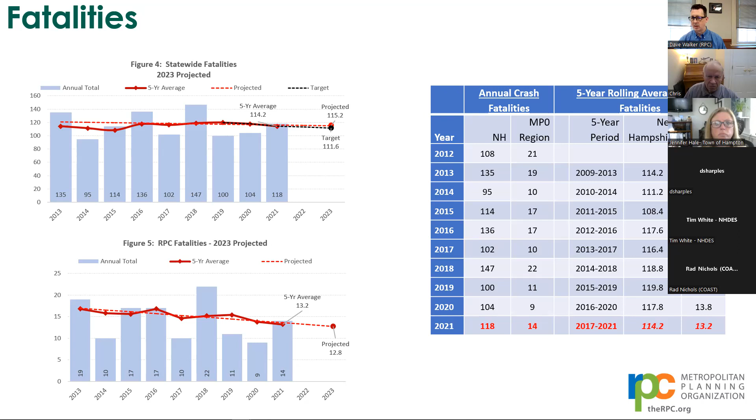And the fatality rate, which a lot of times mirrors the fatalities themselves, at the state level, we're seeing again a fairly flat line in terms of how things are projected to occur. The rate moves up and down slightly every year. We saw an increase in the rate to some degree during COVID, where the VMTs went down, but the number of fatalities didn't decline as much. And we're seeing some of the results of that now showing up in the 5-year trend averages. So again, this one is set up with state numbers on the top and regional numbers at the bottom.

And again, the regional, we're seeing more of a slope curve there with a downward trend projecting outward. In this case, at the state level, the projected versus the target are very close. The projected statewide fatality rate for 2023 is 0.861. The state has set a target of just slightly less than that at 0.857. At the regional level, our projected target would be 0.564 if we did our own.

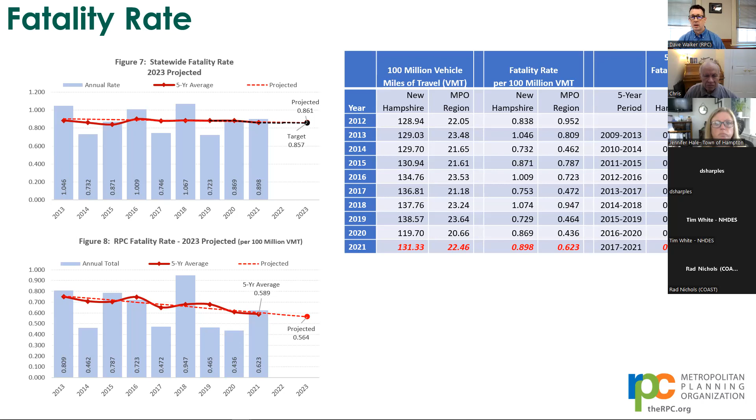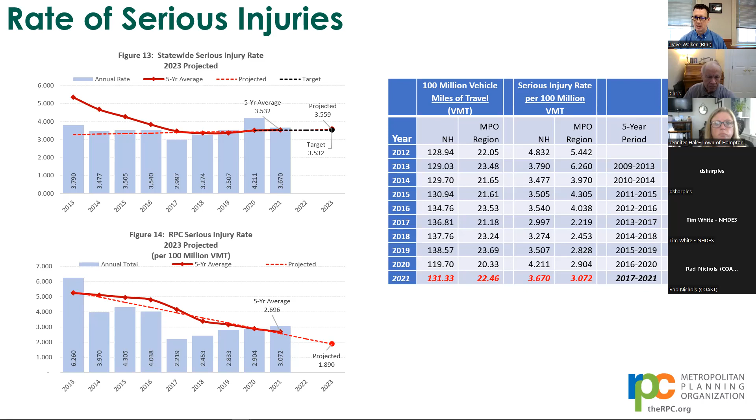Looking at the regional numbers, again, our slope on our trend line is much steeper and has been a little more consistent in that regard. Although we've seen a consistent decrease in the 5-year average rate over the last 5 or 6 years. So things are starting to level out, it seems like, in the region, although the trend line is still projecting downward. Again, similar to the fatality rate, it would have to be a serious drop off in the number of serious injuries in the region in order to reach this projected 2023 rate of 1.890 serious injuries per 100 million vehicle miles of travel. So I would expect, in actuality, that will kind of level off a bit more, consistent with the last couple of years.

On non-motorized fatalities and serious injuries, these numbers are a lot lower than overall motor vehicle fatalities and serious injuries. So there's a lot more movement in the chart because it doesn't take a lot to have a large increase. And at the state level, you can see that it's a fairly steady decline over time. There was a bump in 2021 with a slightly higher number of bike and pedestrian fatalities and serious injuries, but overall the trend has been declining for the last 6 or 8 years.

In this case, the projected value was 33.2 non-motorized fatalities and serious injuries in the state for 2023. The state did not feel like that was a realistic number that was achievable. And so they set the target at 37, which is still lower than the current number, but probably a more reasonable short-term target.

At the regional level, we have the same sort of steep decline over time that we've had in many of the other areas. But our numbers year to year have been fairly consistent. We've had 6 bike and pedestrian serious injuries and fatalities over the last 3 years. So I would expect, looking at just the last several years, our 5-year averages are going to start to level off a bit, and that trend line will start to level off. Using the current linear trend, however, it projected that we would have 4.6 bike and pedestrian serious injuries and fatalities for 2023.

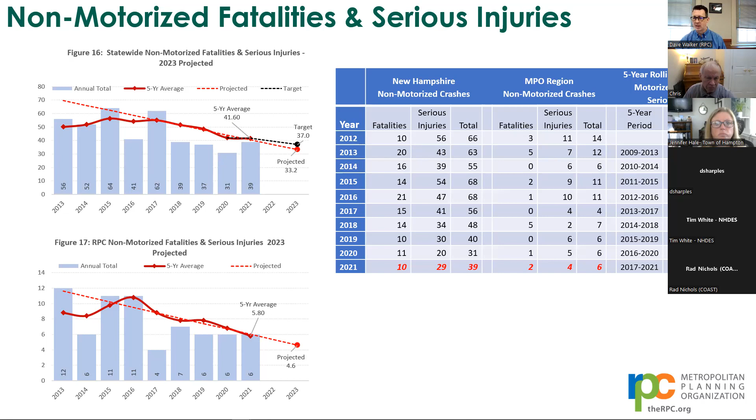So the final one that I want to talk about is motorcycle fatalities. This is an MPO only measure. The state does not track this measure. So we set this one independently from the state, and each of the MPOs around the state has taken on this additional target. But we still are including the state data and the regional data in here for consistency purposes.

And so if you take the state information and run that out, they are projecting 23.2 motorcycle fatalities for 2023. That trend line at the state level has been slightly rising a little bit, I would say. The 5-year averages have stayed pretty steady over time, but we've had some spikes in there that are pushing those numbers up a little bit.

At the regional level, we pretty much go between 1 and 4 motorcycle fatalities each year, and that's stayed fairly consistent at that level. Last year in 2021, we had 2 motorcycle fatalities. And so this has created sort of a flat 5-year trend over the last several years that I would see continuing. And then through that projection, we see for 2023 that it's expected to be 2.9 fatalities for the 2023 year. And again, that's a 5-year average. That's why we're getting the 2.9 as opposed to 3 or 2 or something like that.

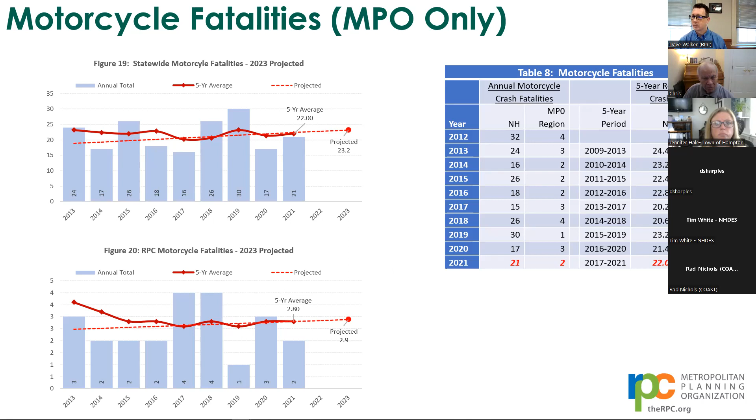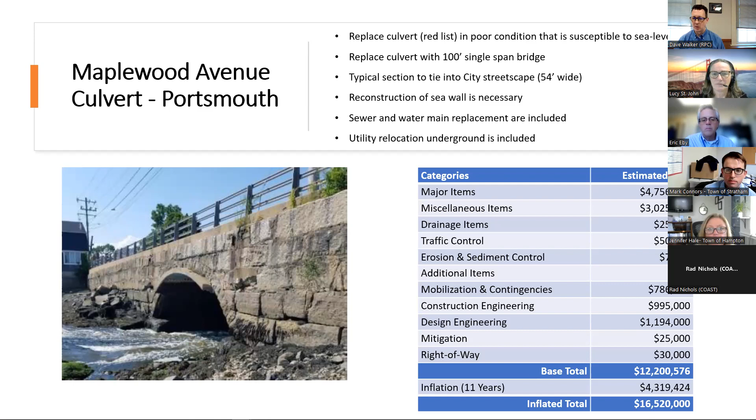And inflation also is added into this. So there's another $4 million in inflation by inflating this out to 2033, I think is where we started with. So total cost on this project is estimated to be $16.5 million. This does include some utility work, of which, that's a question that I would have for DOT as part of their review as to what pieces that might be eligible to be using transportation dollars to pay for. So that's a question we'll put forward to DOT at that point.

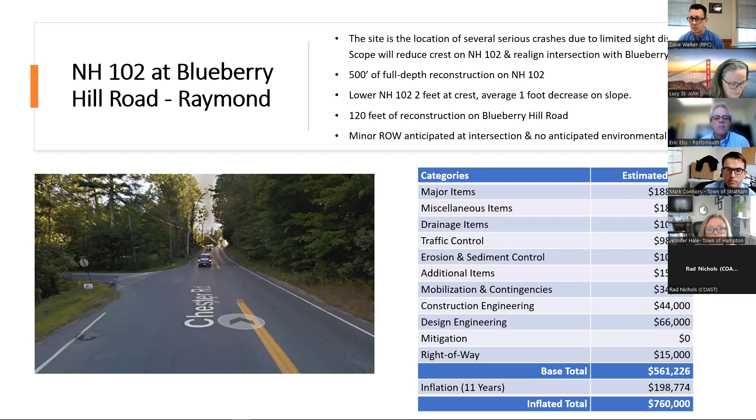High Street in Hampton. This is a project that will look at raising the profile of High Street near the intersection with 1A, raise that by about 3 feet across a 1,200-foot stretch that runs along the edge of the marsh. And is impacted by flooding issues now, and is anticipated to be impacted by more flooding issues under higher sea level rise conditions. So this is one of those, this one and the US 1 project in Hampton Falls.

At this point, these are just data points. We're not sure that this is really the best approach for this location or not, as it creates a mismatch between the height of the road and the height of the housing that's on the north side of the road.

And so that could create some additional problems. There are also expected to be some wetland impacts on the eastbound shoulder as this project is done, because if we have to raise the road, those shoulders will extend a little further into the marsh. Overall, though, this is not, based on this estimate, a super costly project.

Its base cost was just under $2.5 million. And when we inflated that out, it adds another almost $900,000. So 3.3 million is our estimated cost on that at this point.

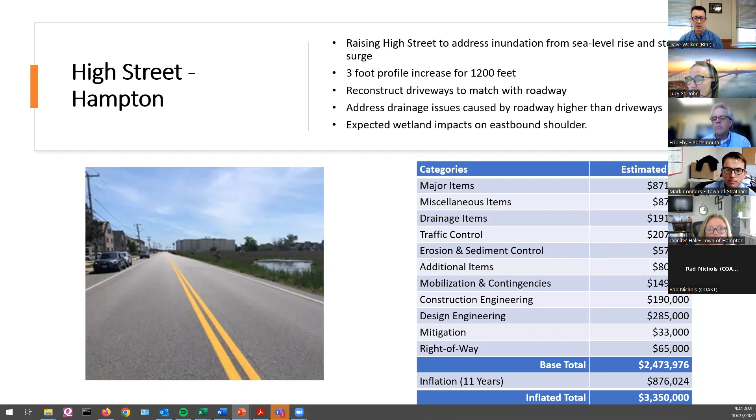Portsmouth Traffic Circle. This is a project that's been floating around in our long range plan for probably longer than I've been here, so 25 years or so. This would replace the existing traffic circle with a 2-lane modern roundabout with slip lanes for right turns. This is based on a design from a feasibility study done in the year 2000 and analysis done for the bypass at around that time.

An advantage of this project is that it's an already disturbed area and there's no expected environmental impacts. And given the size of the existing circle, a big chunk of the work can occur within the existing circle, so you don't have to disrupt traffic quite so much. This is a relatively expensive project, and our base cost is estimated to be about $6.2 million with an inflated cost of $8.4 million roughly.

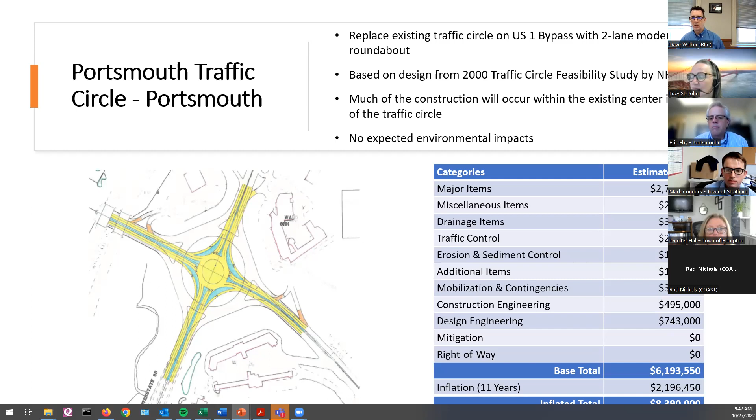This project is interesting. This is on US 1 through the Hampton Seabrook Estuary and Hampton Falls. I think I scoped quite possibly the most expensive project possible for this. I'd like to think maybe it's the most expensive. I can't imagine something more expensive. Maybe if you made a much longer bridge, maybe that would be more expensive.

Basically what this would do would be raise the profile by 4 feet along about 840 feet of roadway, and then basically exchange 1,200 feet of roadway for a bridge down the other end, which would eliminate the sea level rise impacts on that section of road. But it's a very expensive proposition to do all that. Either way, there are expected to be some environmental impacts in the adjacent estuary.

But there may be some benefits to bridging it in that you get better water flow through the estuary. You don't have this barrier to water movement that Route 1 is now, but there's a lot of analysis that probably needs to occur before anything is done at this location. And especially given that the cost is orders of magnitude greater than our regional target, this is not one that is likely to get funded in the near term, but I feel like this is a good data point for us and a good starting point to talk about the needs at this location.

Base cost, $65 million. Most of that is in the additional items, which is essentially bridging. So that's a very expensive proposition. When we inflate it out another 10 years, that adds another large chunk of money. So it adds another $23 million. So our total estimated inflated cost is just over $89 million.

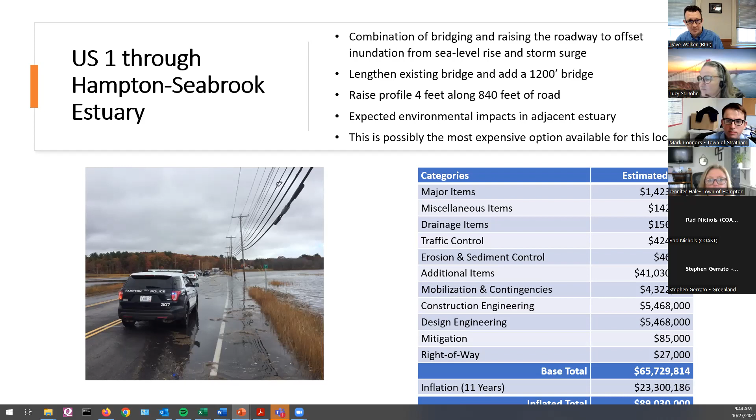All right, back over to Stratham, New Hampshire 108 bike ped improvements. This is making improvements to sidewalk facilities and shoulders on 108, which is a high volume, very wide and high speed roadway through this section. This will add sidewalks, side path, and some improved crossings and connections. So we're looking at adding just over 3,000 feet of sidewalk along 108 southbound and 5,600 feet of side path along 108 northbound, and adding mid-block crossings at 3 locations there.

So I forgot to change the picture out, so we're still looking at a picture of the Route 1 in Hampton flooding. So that is not what 108 looks like through there. So this project is a lot less expensive than the Route 1 project, and it comes in as a base cost of just under $2 million, so $1.8 million. Inflated out 10 or 11 years, this comes up to just under $2.5 million.

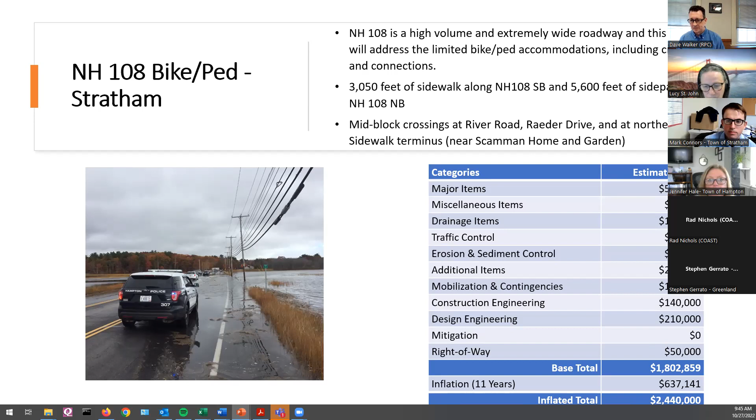All right, so back over to Hampton, Route 1A, Ashworth Avenue complete streets. This would basically improve bicycle and pedestrian accommodations between Nudd Ave and Dustin Ave in Hampton Beach. This would put 8 foot sidewalks on both sides of the road and include a 5 to 6 foot bike lane. That design is based on the Hampton Beach Transportation Master Plan that was completed in the 2018 timeframe, and so this estimate is based on that information. It would also include 2 11-foot travel lanes and 20 mid-block crossings with curb bump outs.

This does not deal with any of the sea level rise or flooding issues along the road, although it would improve drainage as part of it. The reason that this is included is this is the one section of 1A that isn't included in Hampton 40797, which is the Ocean Boulevard reconstruction project. So we sort of wanted to complete the circuit on that and get at least a cost on what it might take to deal with this section of the road.

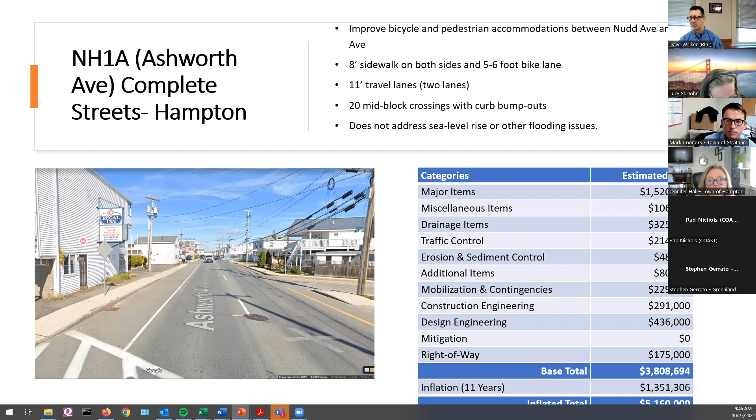So overall, this is a little bit of an expensive project, not terrible, but a little higher than some of the others that we've seen. A base cost of $3.8 million. There's a lot of work that would need to occur on the road to deal with that and make those improvements. And then with inflation, we're adding another almost $1.4 million to that for a total cost of $5.16 million.

Okay, and last but not least, the last project that made it to our short list was the Stratham Circle redesign, where 108 and Route 33 come together. This would reconfigure the traffic circle into a single modern roundabout intersection. This design is based on the 2010 Stratham Town Center District Study, and basically it would put that circle in what is sort of the northwest quadrant of the current circle.

So it does require some culvert and dam replacements, as there's a pond in the center, and the drainage runs right underneath where that roundabout would be proposed, so it would need to be addressed. It would also dead end what is now the current northbound segment of that circle.

So this is a relatively expensive project, I think, given the scale of changes that are occurring, estimated at just under $8.9 million base cost. And then when we inflate it out 11 years, it adds another $3.1 million. So it gives us about a $12 million project right there.

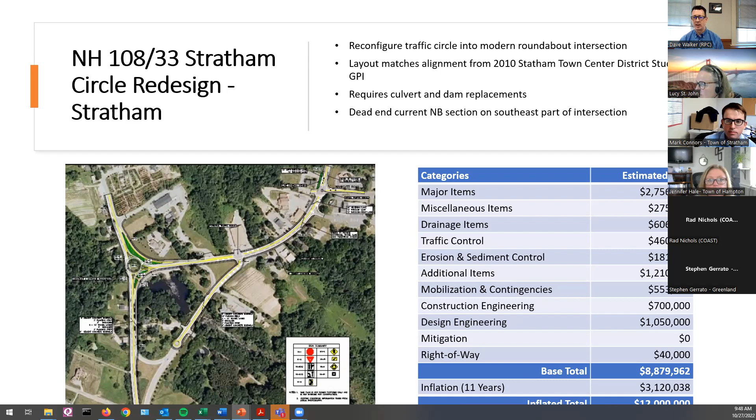So what we need to do today is make recommendations to prioritize and fiscally constrain our list to send to NHDOT for review. Typically, this would mean constraining it to $8.055 million, and then adding 2 projects to that to give us some options. In this case, pretty much no matter how we cut it, that gets us to the 5 projects that are pretty close to being within the budget.

And so after talking with William Rose, he indicated that us submitting 5 projects would be okay. So that makes it a little bit easier for us in that we don't have to make a decision at this point about dropping projects. Well, I guess we still do, but I think it'll be the fairly obvious projects. And we do need to send a prioritized list to DOT, so we do need to prioritize them.

In that regard, I have put together a proposal as a starting point for the TAC to work from. This proposal is that the 3 projects that are by themselves, from an uninflated perspective, greater than our regional budget target, we'll submit to DOT for information only, just to make sure that they have those estimates. But we won't be looking for them to review them or provide comments back on those. It's just really for their information.

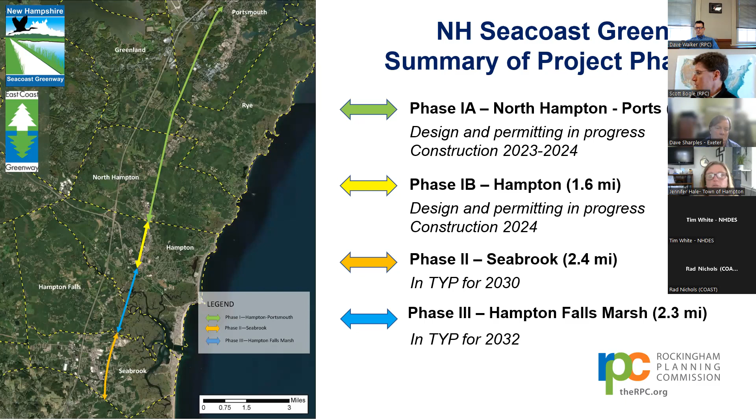So we've talked a bit in the past about our technical assistance grant that we currently have with the National Park Service Rivers, Trails and Conservation Assistance Program. There are really three projects we have that group working on. The first of those is this community connections and trail access points element. They're also working on a signage plan for the corridor.

One of the stipulations of the trail management agreement that each town signed with the Department of Transportation is that before signs can be installed, we need to produce a signage plan and get DOT's okay on the signage types and locations.

And then we're also getting some assistance from the Park Service in standing up a new nonprofit trail organization that will have a role in trail promotion, in fund development, and in volunteer recruitment and management for doing routine trail maintenance in each of the communities.

So as part of that first element, Julie Isbill, who's the leader of the Park Service team, connected us with Bob White, who works for GPI. And he had worked with Julie on prior projects in Maine, organizing Maine's chapter of the American Society of Landscape Architects to recruit essentially a team of landscape architects and other designers for charrette projects on trails.

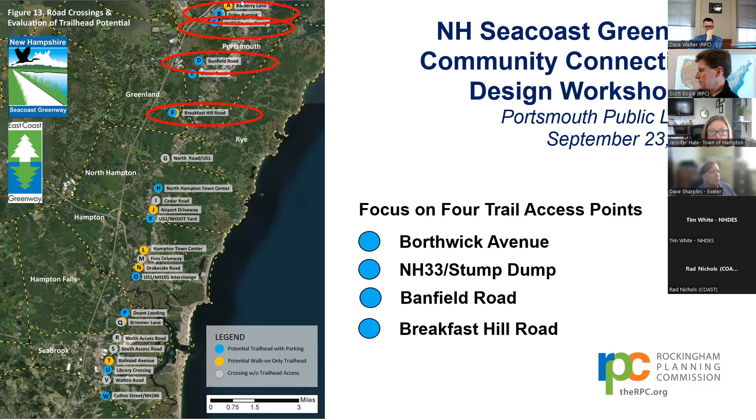Okay, so just running down the corridor, the first of the sites we looked at was Borthwick Avenue. There's actually a relatively new road off of Borthwick Avenue, Eileen Dondero Foley Drive, and a trail connector off of that connects to the rail trail. On that road, there's a new parking lot, a new medical building, which is sort of serving as an ad hoc trailhead currently. But that's a private building, private land.

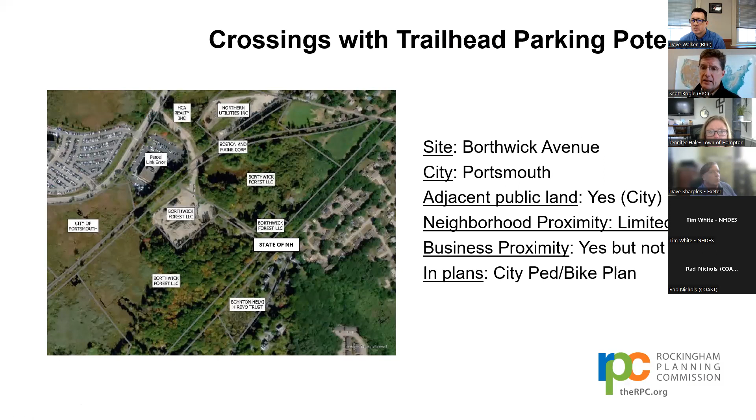And the assumption is that once that building is fully occupied, it's really not going to be practical as a trailhead. However, just across Borthwick Avenue, the city owns land here. So here's Borthwick. Here's Eileen Dondero Foley Ave. There's a side path on Foley Ave that leads down to the rail corridor.

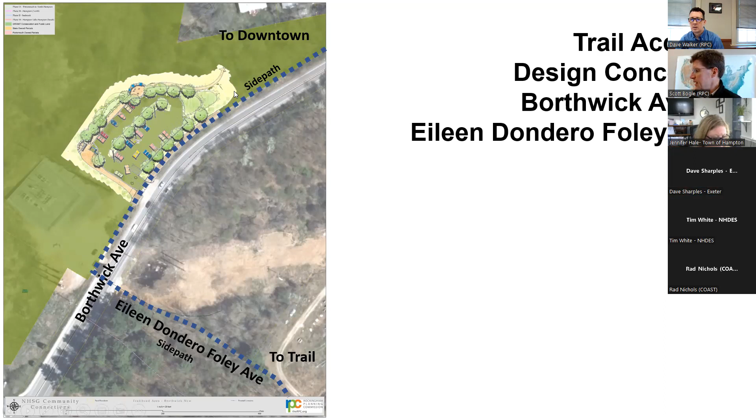The city has in the planning a side path that will run along Borthwick, cross over the bypass, carry on through the new West End Yards development, cross over Bartlett, and then along the North Mill Pond and meet up with Maplewood Ave. But so the first of the design concepts was for this lot on city-owned land here. So this holds about 40 parking spaces.

The charge for the design teams was for each of the corridor communities setting a goal of trying to come up with at least one site that could support parking and a range of amenities, including a kiosk, potentially a shelter, ideally an enclosure for porta potties, as well as water, potentially a bike maintenance station.

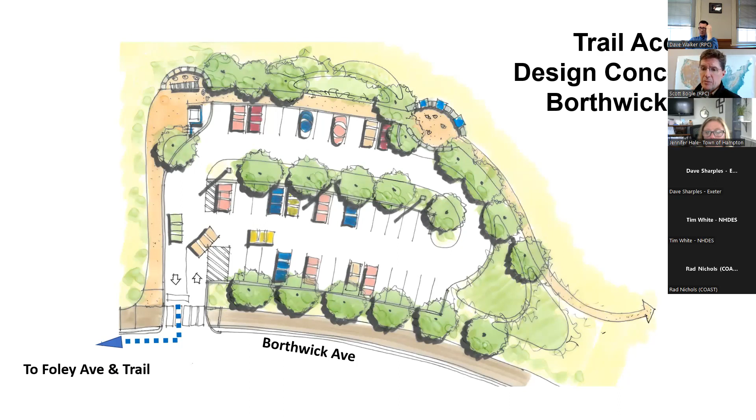So the next of the sites that the team looked at was what's known as the stump dump. Here's the rail corridor. Here's Route 33. Greenland is this way. Then Islington Street heads off here. This parcel here is currently being used as a layup area by Severino Construction, but the city has planned to put a skate park here as well as a trailhead site.

Portsmouth actually has in their CIP funding for developing trailheads at the stump dump site as well as at Banfield Road. So there is adjacent public land here, not much in the way of business proximity. There is adjacent neighborhood over here, as well as park facilities.

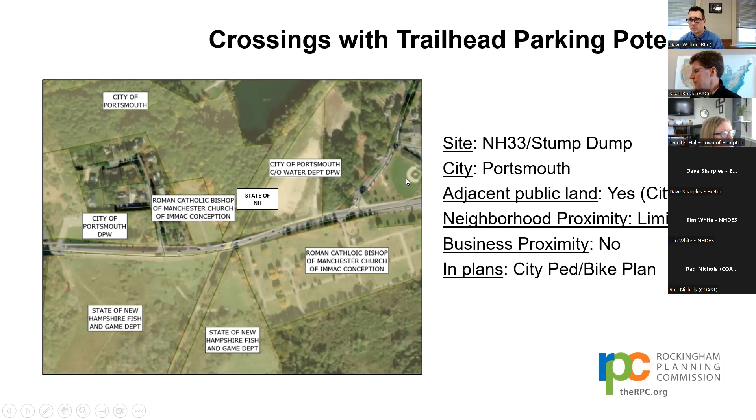So here's the concept of this. Essentially, during the day, we had the design team doing drawings. We were able to scan those on the fly, put them onto base maps that our GIS folks had prepared. For this site, we also had the 30% design documents from Weston & Sampson for the skate park itself, and so how this all fits together on this site.

So there's already planned parking for the skate park. The design concept was to extend that further to the north, a little bit along the same property, fitting in an additional 30 or so spaces, and then joining up to the trail up here.

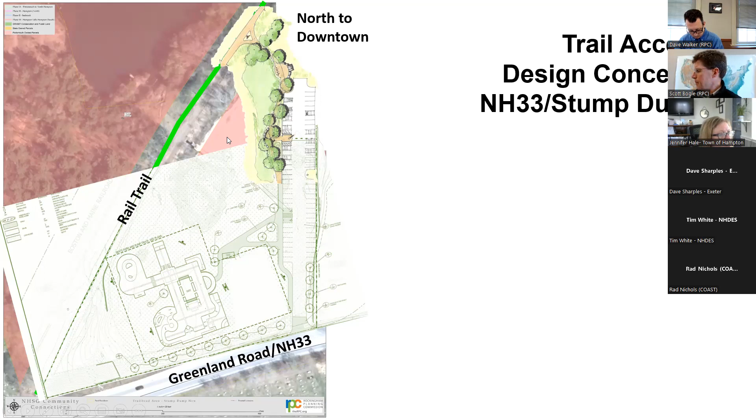While the bulk of the corridor is going to be a stone dust surface, Portsmouth has a plan to pave the corridor from Route 33 north into town to facilitate access for kids coming in with skateboards and just for maintenance reasons, that being what's anticipated to be a heavier trafficked area. And then you see a close up here.

Banfield Road, here's the rail corridor coming down from the north, owned by the state. Here's Banfield Road. You have an acute angle intersection. The actual crossing here, I think, will be straightened out for safety. As part of DOT's design for the corridor, they are planning comprehensive safety treatments at each of the grade crossings, including rectangular rapid flashing beacons.

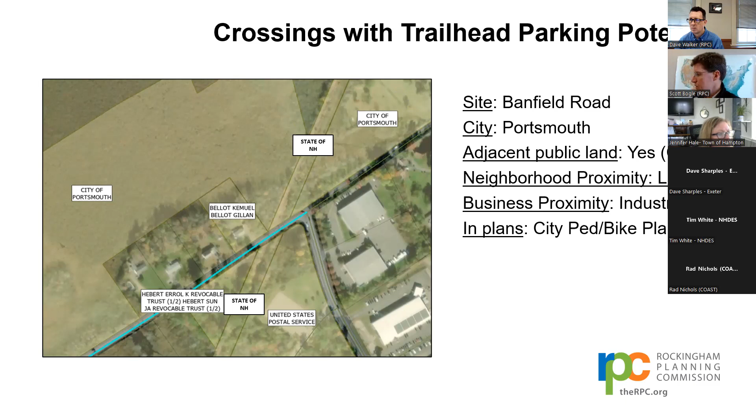But for this site, the concept the city has in mind is not to have trailhead right here at the intersection, but rather farther up here. This parcel is also known as the TP property that some of you may remember reading about in the news years ago when the city acquired it. Part of the reason that it's not practical to build trailhead right at the tip of that parcel is that section of the lot is wet, designated as wetland. So this design looked to get up outside of the wetland buffer area.

This is the site where we believe there's potential to put an equestrian facility as well. This has about 35 parking spaces worked in, a shelter concept here. There's some beautiful trees on the property. The expectation is to look to save those. There's also city water and sewer here, so there's potential for water service as well as sewer.

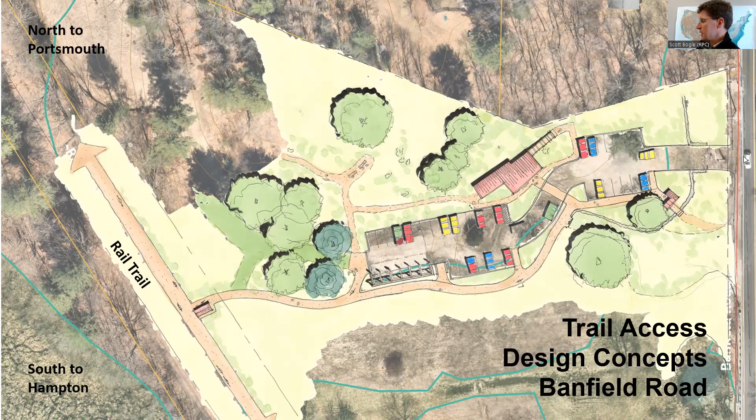The design team came up with concepts for shelters for a couple of the sites, mainly this one, and there will be a shelter at the stump dump site. And then you'll see one further south at a site at the North Hampton town line.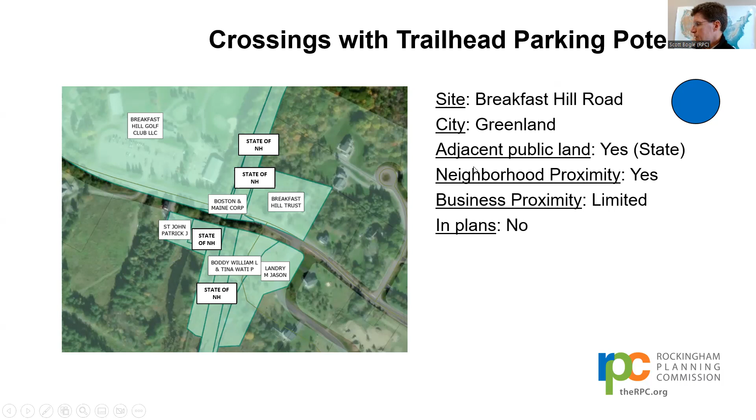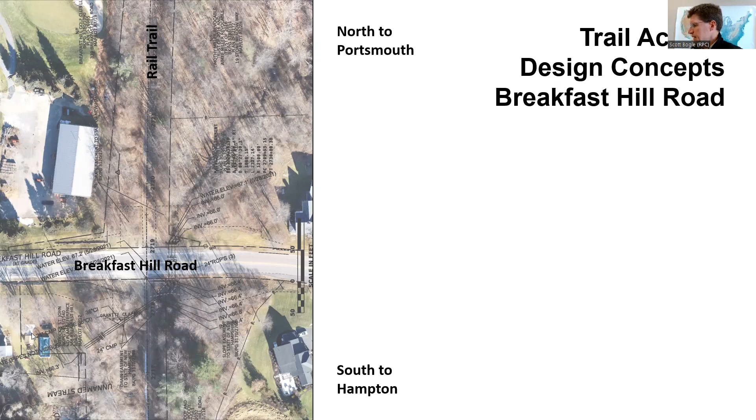In terms of residential development, there are several big neighborhoods, several big subdivisions about half a mile to the west. And there is a plan that's expected to come forward, I think, in both Greenland and Rye for a substantial new subdivision up here on the northeast quadrant. The corridor here gets unusually wide through most of its length. It's about 66 feet wide, I believe. It gets a bit wider here at the road intersection. And then you can see this parcel here. You can see some encroachment in here from the neighbor. There's a shed and an above ground pool that is in that space.

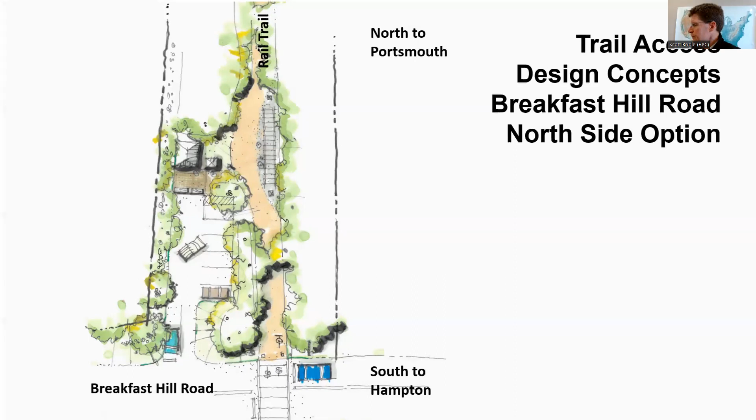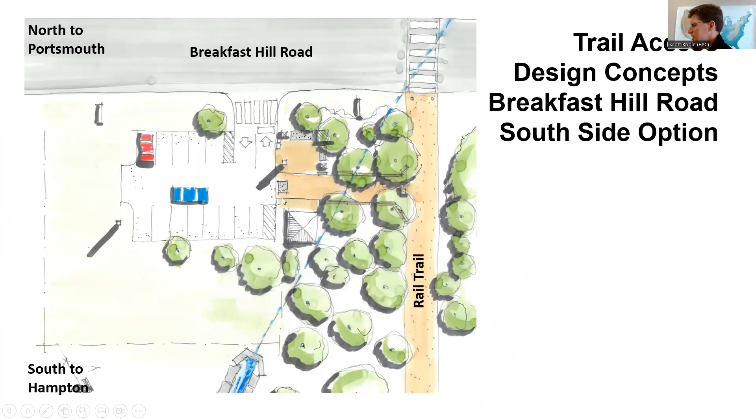The design team came up with a couple of concepts that, with that additional width on the north side of Breakfast Hill Road, you could fit in, say, half a dozen parking spaces with a small shelter. Concept here, keeping in a section of railroad ties and rail. It would actually mean bringing in new rail because the rail has been removed at this point. But having something that is a reminder of the railroad usage of the corridor historically. And then a layout for that parcel on the south side of the road, where there's potential to fit in. This shows about 13 spaces. So that was the work of the first of the design workshops.

The second one we just held last Friday at North Hampton Town Hall. And we looked at 5 additional sites here, right in the town center where the corridor crosses under Route 111, the L.L. Bean Plaza on Route 1, where the trail passes under Route 1 at the North Hampton town line, looking in Hampton Town Center, and then down at the Route 101 interchange.

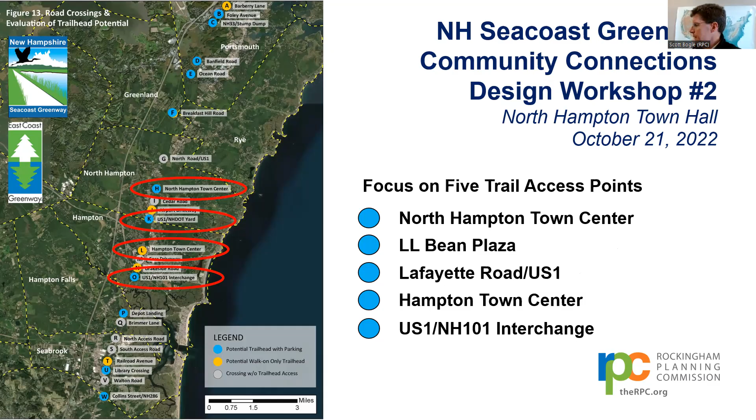We had some overlap in our design team for this workshop. Bob White from GPI and Ken Frere from Placework. We also had some great additions. Terrence Parker, who's a Portsmouth-based landscape architect and had been involved with the Eastern Trail project in Southern Maine. Colleen Wolf from DR Horn, Jeff Brubaker, who's now the Eliot town planner, but had worked as a bike ped planner with Toole Design Group prior to that. Tony Ciolfi with TEC Engineers in Hampton, and then our team from National Park Service, which included actually 2 landscape architects and a graphic designer.

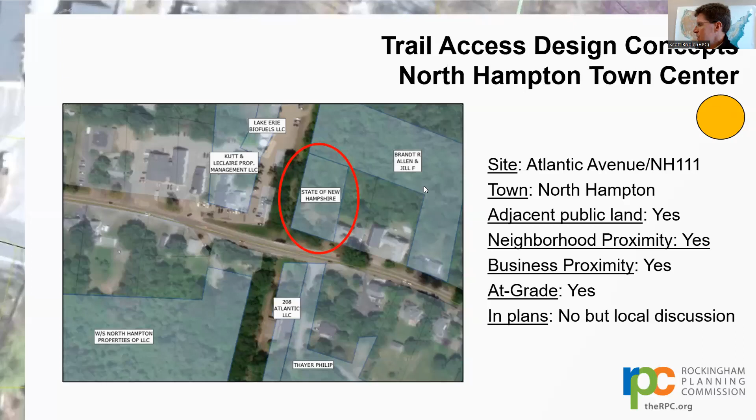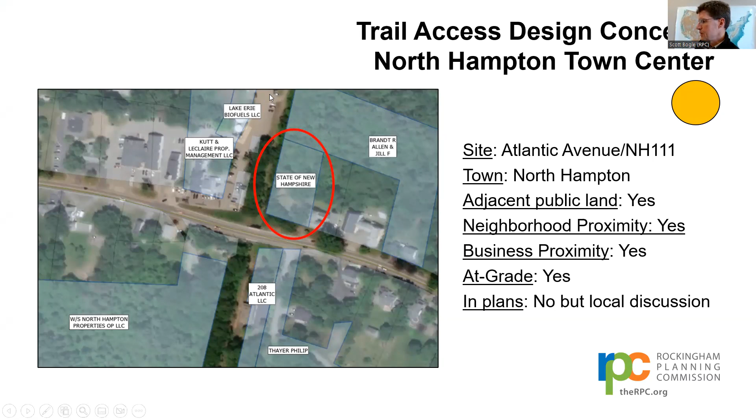The town is, let me go back up, in conversation. In this map, this shows as being part of the rail right-of-way, and that's actually outdated data. Currently, that is privately owned next to the rail corridor, but there's a space up at the top of that parcel where the town's been talking with the landowner, and the landowner may be amenable to having a small trailhead of 10 to 12 parking spaces, so there would be some parking access here. So here is the concept that the team came up with for North Hampton Town Center. The town's been in discussion with the L.L. Bean Plaza. This also has a Marshall's and a Home Depot on it.

Along Route 1 that some of you may be familiar with. The owner of the plaza as a whole actually owns other big box and retail plazas of this sort in Massachusetts, one of which at least has an L.L. Bean, and at another one of their locations, the plaza owner and L.L. Bean had cooperated with the local trail organization to establish a trailhead, set aside some parking spaces as part of

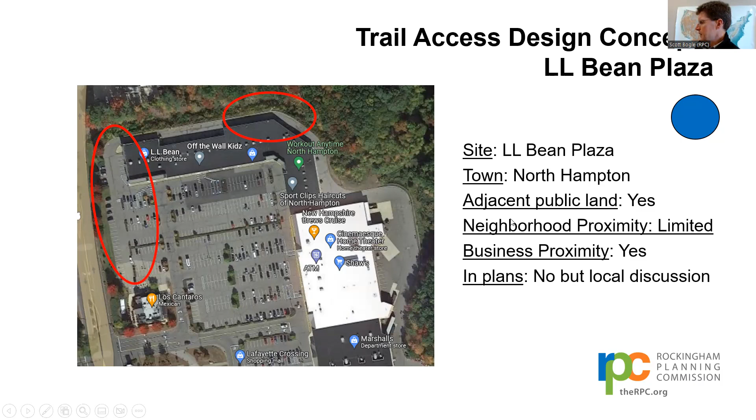the shopping center lot. And so the concept here, currently there's a goat path that heads out from the northern part of the parking lot towards the trail. And at this point, the trail would be over here just off the screen. The developer seems amenable to this. L.L. Bean seems to be interested. There's a good tie-in with their kind of outdoor brand image.

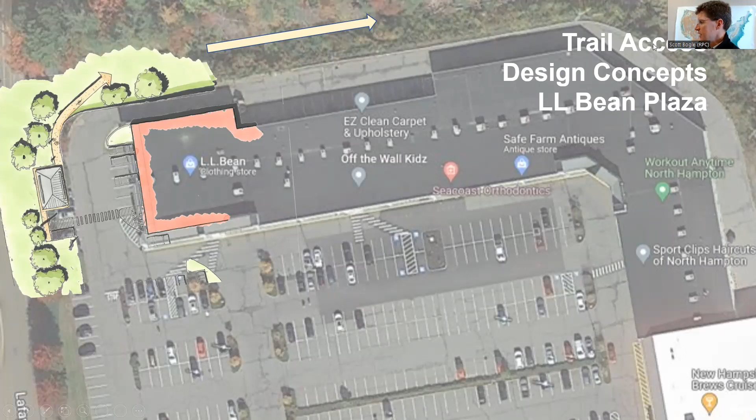And the concept that the team came up with was a shelter here. There could be signage to make this visible, apparent to passing traffic on Lafayette Road. Setting aside some number of parking spaces along the outside of the parking lot. And then having a path that leads from here off of the pavement, because this is essentially truck access around the back. And there's also quite a bit of grade separation. There's retaining wall all along the back here. So by getting off of the pavement here, it allows for a fairly shallow slope to get back to that path that leads out to the corridor.

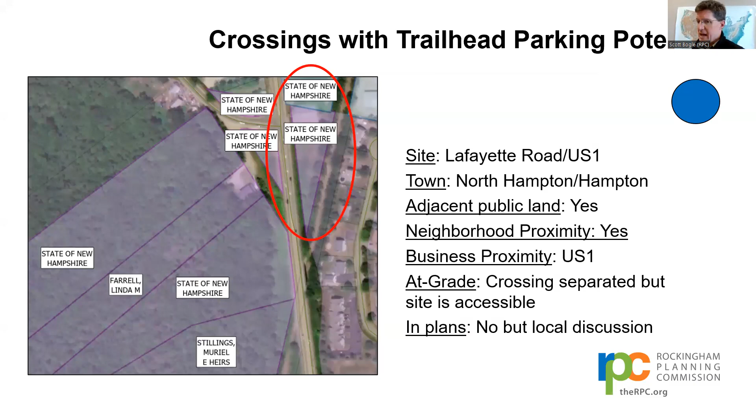One of the parcels with great potential in the corridor is a DOT maintenance yard that's right at the Hampton-North Hampton town line. Both towns have been in communication with DOT about this. There's a shed on the parcel here currently, which is used for storage, I believe, of snow removal equipment. There was a meeting last year that Deputy Commissioner Bill Cass came to, Brian Scott, town officials from both communities, and Senator Sherman, talking about what could be done with this corridor.

The department has expressed a willingness to make the northern part of this available by the time the trail opens in 2024. There's a potential to have about 40 spaces here on the northern part. And then when and if an alternative storage site can be identified for the equipment that's in this shed, the department had expressed a willingness to have the site turned over entirely for trail use. So there was a phase 1 and a phase 2 concept. Phase 1 you just saw for having some initial access when the trail opens in 2024, assuming it will take some time to replace that storage capacity for the department. And then potential phase 2 site expansion with additional parking to the south here.

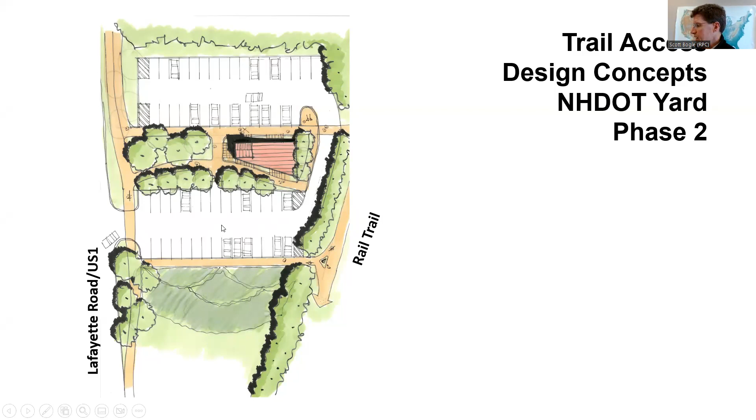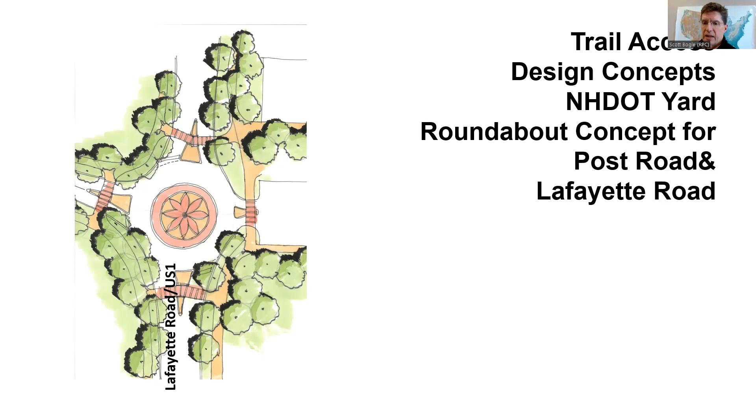Now, one of the hitches with this site is that Route 151 Post Road comes in from the west, immediately opposite to the current entrance to the site. And so adding a new destination with turning movements here, the expectation is that with traffic coming in off of Post Road, there'll be need for some sort of intersection treatment there. And so this idea for a 1-lane roundabout was just sort of reeled off in the afternoon last Friday. I think it's more likely that if this were to be a roundabout, it would need to be a 2-lane roundabout in order to handle the traffic volumes on Route 1. But I think that would be a next phase of analysis.

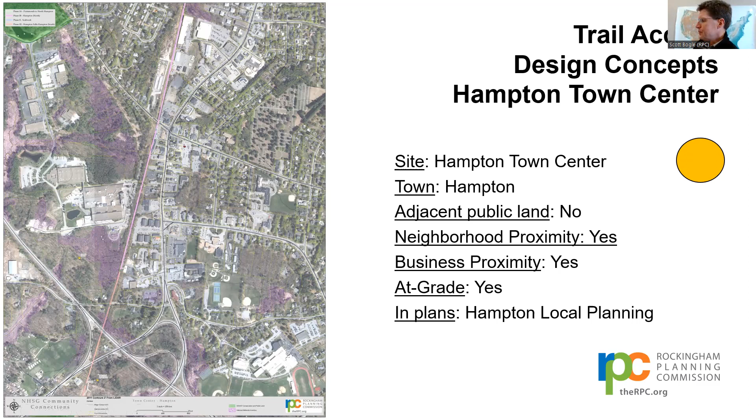But Jamie Sullivan, the town manager, and Jason Bachand, the town planner, spent some time on Friday morning going around and visiting sites with the design team and really identified several sites that are currently privately owned, but there's a possibility that the town could work with those private landowners to set aside some amount of parking. There's a large development planned up here near Hannaford on this lot here off of Scott Road. And the town has been in communication with that developer. There's a parcel that holds a daycare center here just north of the post office.

So there's some potential there. And then across from Winnacunnet Road here, there's a Rite Aid, and at the back of their parking lot, they have a fairly substantial parking lot in the back there. And there's a thought that there's potential to work with that landowner to have some parking set aside.

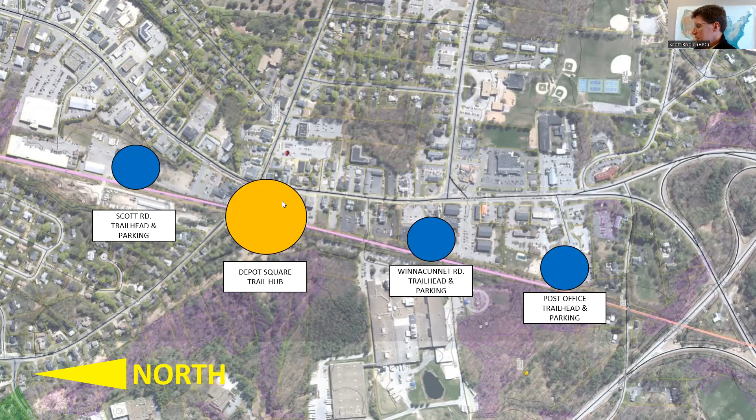Here at Depot Square, which is really the heart of the town center, the land is privately owned here. You've got Bogie's, you've got... so Route 1 is up here north this way. There's a strip of land here that's owned by Foss that the design team looked at as potential to have kind of a pocket park along the trail.

As part of the planning for the trail itself, there's going to be a fairly substantial stormwater retention basin here to deal with drainage issues on the corridor. But this concept just shows a pavilion, picnic area, trail information kiosk, some sort of public art installation, a bike fix-it station. There's currently a goat path that heads off of Route 27 Exeter Road down to this parcel now. So this was thought of as having potential to discuss with Foss.

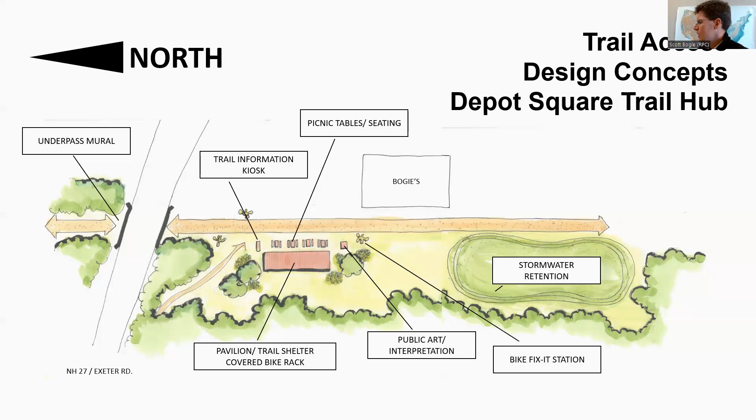So just looking at the last site, when RPC worked with McFarland Johnson back in 2013 on a concept for realigning the Route 101 interchange, there was an element of that project that looked at potential to put a transit center on that parcel. Ultimately, the town, the select board determined they weren't interested in the transit center. However, there was interest in having a trailhead there.

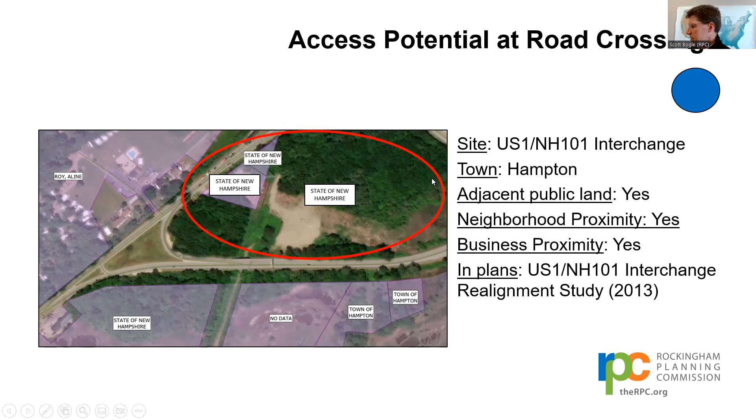This is Route 1 southbound barrel currently, Route 1 northbound barrel here. The rail corridor comes right down through there. And all of this land internal here is owned by the state. So this shows the preferred alternative for reorienting that interchange, turning it into a diamond interchange. This project is currently in the 10-year plan for design to start in 2028. But the hope is that, since a trailhead was specified in the conceptual design study, some level of trailhead facility could be included as part of that project.

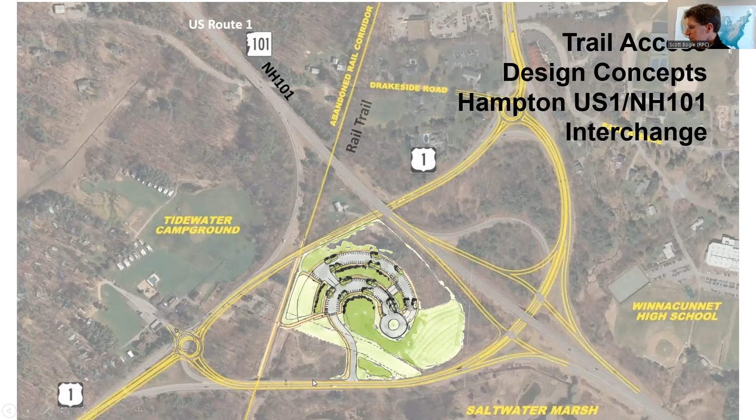This was a concept that was sketched out on Friday afternoon and would hold, I think, about 150 cars. This was perhaps larger than would be able to be included in the intersection realignment project, but with access here to the trail.

We also had the graphic designers in the group look at potential sign designs and coming up with kind of a family of signs that can be incorporated into the signage plan. And the concept here was to use rail ties paired to really get at the concept of this being a former rail corridor, i.e. long and straight, and express that with the verticality of the signs here. So this shows essentially a map of the entire corridor. There'd be a "you are here" kind of note on the map, having the trail logos.

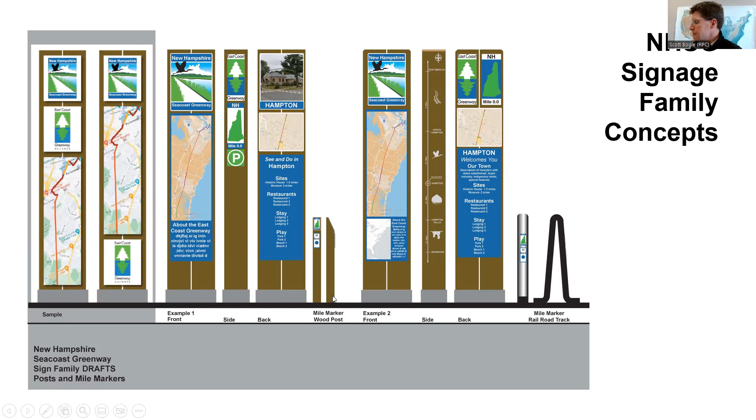And then one concept for each of these would be to have information on amenities that are nearby at these trailheads. And then this would be a more zoomed in locator map of, okay, from where you are in Hampton's town center, here are ice cream locations, here's a bike shop, here are restaurants and so forth. And then here's how you get to the beach. There's a concept here for mileage markers for safety purposes, as well as bike parking.

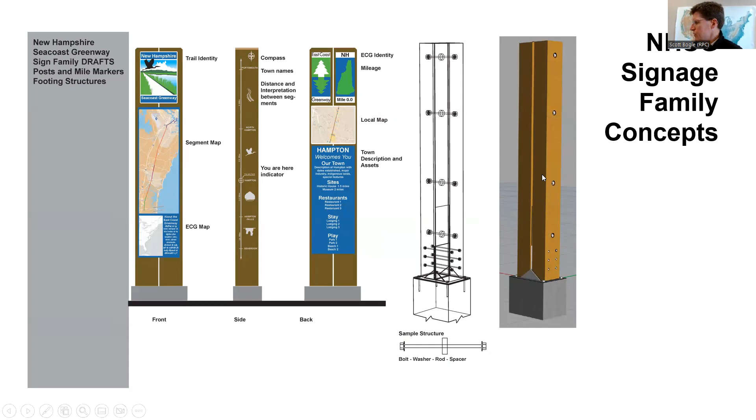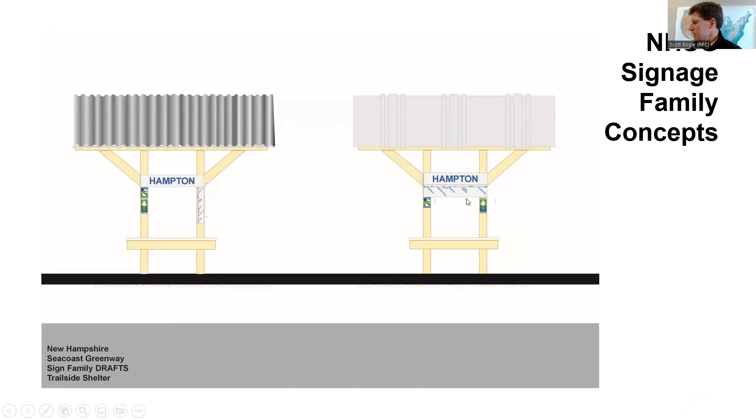Getting into a little detail about how construction of those signs could be handled. Another concept for directional signage, directing people off the trail to different amenities. An alternate way of doing that. Concept for shelters that could be located at those different trailhead sites, kind of mimicking old streetcar or railroad shelters at more rural locations, that would identify the location, have a covered seating area, noting locations to the north and south and distances. And then a concept for a kiosk that would have trail information.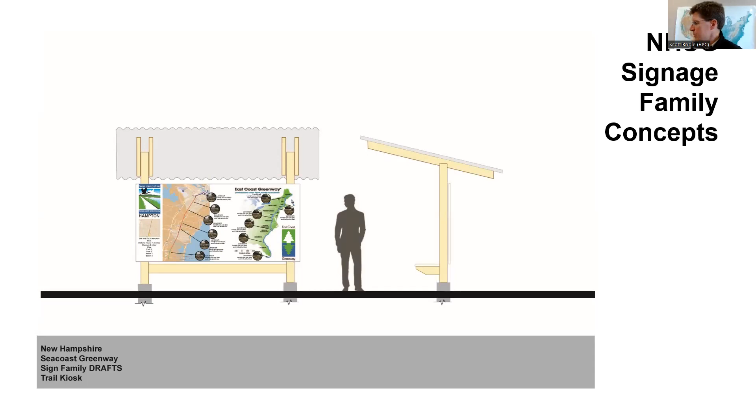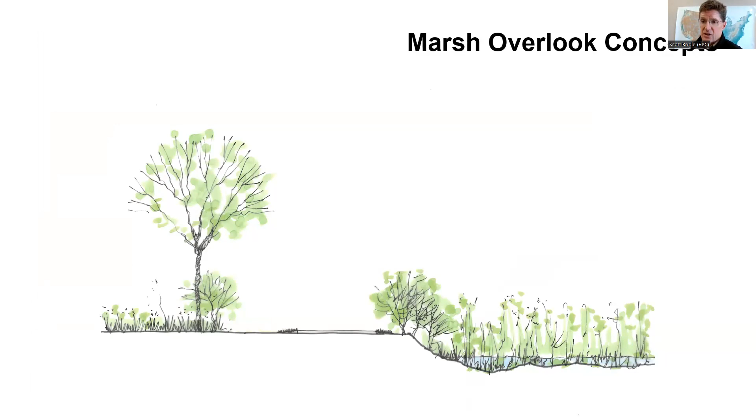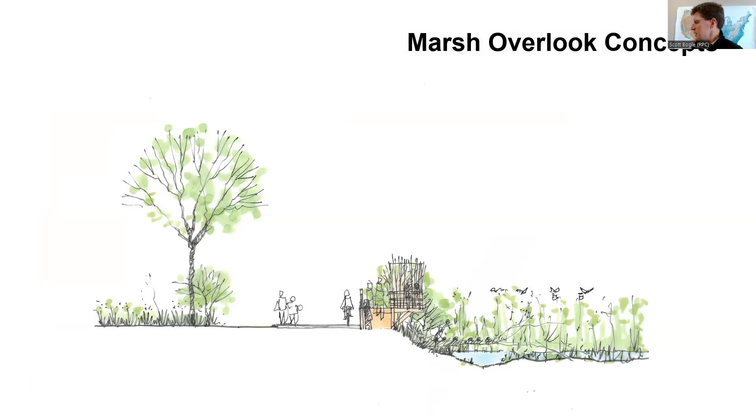There's a separate concept that was developed for interpretive signage along the way, which I don't have here. And then this is just a series of ideas that was developed for viewing areas, as this section of the trail goes through substantial portions of freshwater marsh up through the Great Bog. Here's the base trail, options for elevating, allowing people to get a little bit of elevation to look out over the marsh for bird watching or other wildlife viewing purposes. Here's an option that would create an extended elevated section of the trail. And then yet another option that would elevate still further.

So that's the material that came out of those design workshops. I'm really pretty amazed with what the design teams came up with in 5 or 6 hours in 2 afternoons. Really our goal with these is to now have some visuals, concepts that we're sharing with the municipalities, and also potentially sharing with some would-be corporate donors that have expressed interest in funding trailhead development. So I think the next step with each of these is going to be working with an engineer to get an engineer's opinion of probable cost to have some numbers that go with each of these sites.

So I'll stop sharing, but I'd be happy to answer any questions on where things stand. Or maybe I've worn you all out with a long presentation. Lucy, I see a hand up. I just had a quick question. What kind of participation did you get from the public at the sessions? Was it good attendance?

At the Portsmouth session, we had, I want to say, about 20 people that came during the day. And then we had 25 that came in the late afternoon. These were both on Fridays. So we had the final presentation from 5 to 6:30. The hope was that we would get people to come, say, after work and before they headed out for their Friday plans, but it is a challenge to get people to come out on Friday.

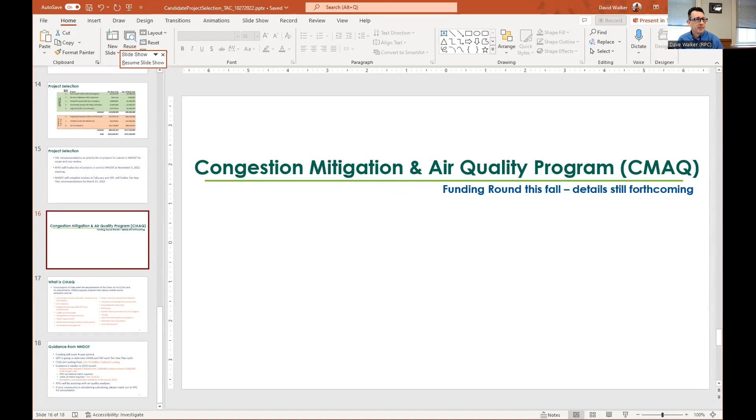Okay. Okay, so this is about CMAQ again. Can everybody see that?

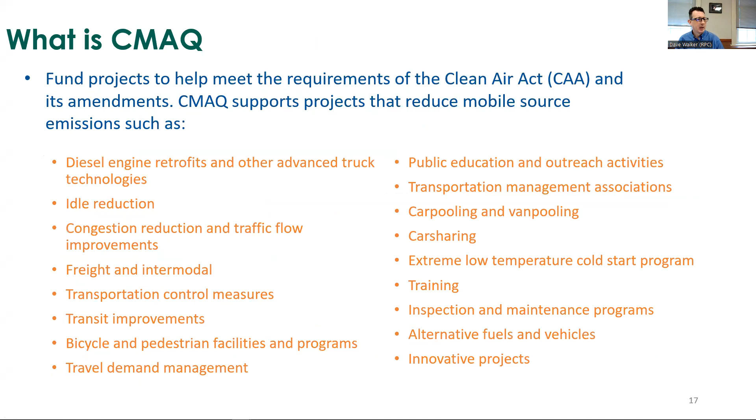Yep. All right. So I won't go through what the CMAQ program is again, but we had some updated guidance since we talked about this last month, and I just wanted to cover that a little bit. So the current funding round will cover a 4-year period. That's not new information. And DOT is going to alternate TAP and CMAQ for each 10-year plan cycle.

Again, not new information. Probably the newer information is that the pool is closer to 30 million in federal funding available. Guidance will be similar to the last round done in 2019, but we have a higher upper threshold for project costs. So projects between 200,000 and 2.4 million in federal funds. So we have an upper limit of a $3 million project in total project cost. Actually, I shouldn't say that. Upper limit of 2.4 million in federal funds, but if you overmatch projects, you could certainly go higher than that

in total project costs. Again, letters of intent are required and are due early in November, so in just a week here. There is also a mandatory pre-application workshop in December that anybody who wants to put in a full application will need to attend. And then once again, we'll be assisting with the air quality analyses on these in the new year.

And if you're thinking of submitting a project or your community is thinking of submitting, if you could reach out to us so that we have a heads up on what's going on, maybe we can provide some insight. So that's all I wanted to say about CMAQ. Oh, David, good question. When you say it's a 4-year period, does that mean the 30 million is spread out over those 4 years? Yeah, it would be programmed across those 4 years. Okay. And typically in the past, it's been on a 2-year cycle.